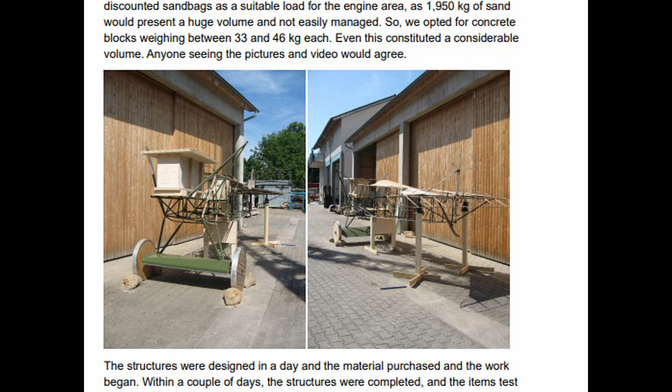We had already discounted sandbags as a suitable load for the engine area, as 1950 kilograms of sand would present a huge volume and not be easily managed. We opted for concrete blocks weighing between 33 and 46 kilograms each. Even this constituted a considerable volume. Anyone seeing the pictures and videos would agree.

The structures were designed in a day and the material purchased and the work began. Within a couple of days the structures were completed and the items test installed. It all looked fine and the date of the test was set for the following Monday, weather permitting.

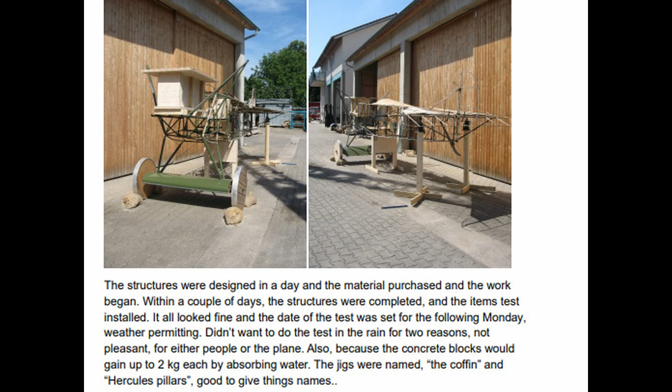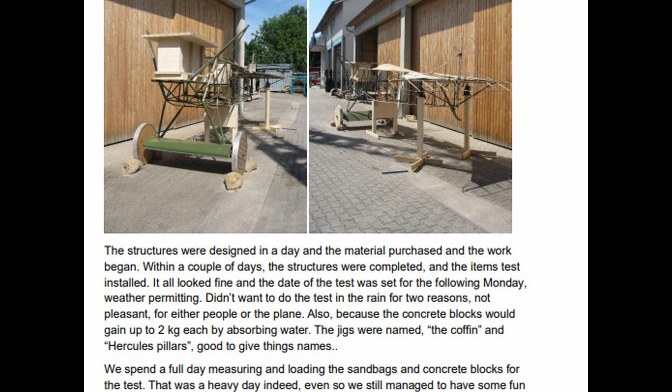Didn't want to do the test in the rain for two reasons: not pleasant for either people or the plane, and also because the concrete blocks would gain up to 2 kilograms each by absorbing water. The jigs were named the Coffin and Hercules Pillars. Good to give things names.

We spent a full day measuring and loading the sandbags and concrete blocks for the test. It was a heavy day indeed. Even so, we still managed to have some fun and enjoy the bikes and the barbecue.

The rest of the first week was taken up with building ribs with Shirley in the bunker and working out minor issues with the bikes, cleaning the carburetor on one, to find the cork float had been attacked by the fuel as its protective varnish coating was damaged. Another bike, the DKW sidecar, was also worked on to get it to run, which it did for a while but died after 10 minutes. No amount of kicking would make it go again that entire day.

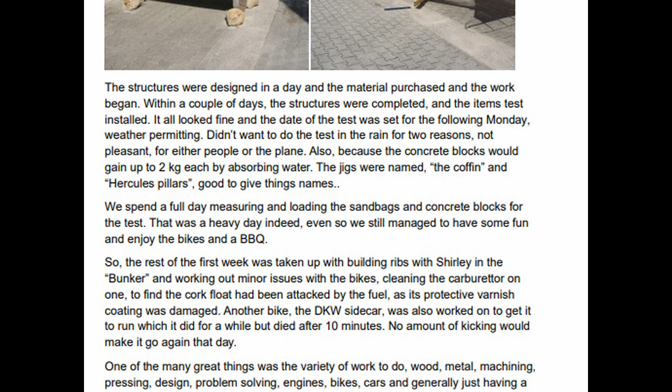One of the many great things was the variety of work to do: wood, metal, machining, pressing, designing, problem solving, engines, bikes, cars, and generally just having a lot of fun. This made for a very relaxed and interesting workplace. Schedules and timekeeping not an issue.

That is not to say that there is no schedule, but an overall outline plan. There are also lots of other interesting projects going on in the background that contribute to the overall building of the planes, like the colors for the printed fabric, the different fabric types, bleached and unbleached, the paint finishes. All these things and many more are tried and compared to original photos, reports, and historic reference material. No detail is too small to achieve the overall authentic build of a Fokker aircraft.

All items are subjected to some form of test, be it load or destructive tests. The purpose is to be sure the components will not fail in flight and to understand the logic of why and how the design was determined. I can say that I'm very surprised about the loading capabilities of these structures. The structure is light, yet very strong, perfect for aircraft operations.

We also went over many Fokker photos and looked at how the tests were undertaken and the sheer number of tests undertaken. This shows without doubt that Fokker took structural integrity very seriously. The historical records support the view that it was not design failure but material and poor execution of building that caused issues with the Fokker aircraft in operational duties.

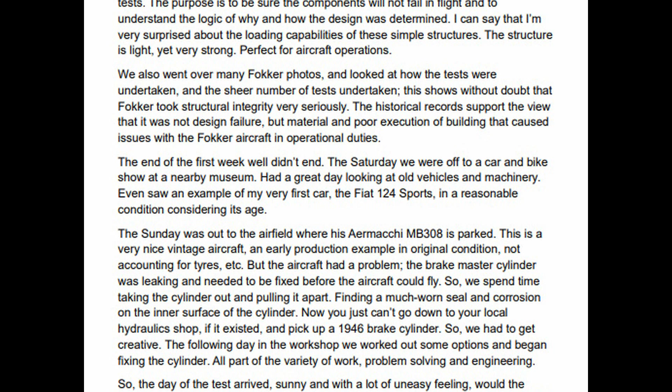The end of the first week, well, didn't end. The Saturday we were off to a car and bike show at the nearby museum. Had a great day looking at old vehicles and machinery. Even saw an example of my very first car, the Fiat 124 Sports, in a reasonable condition considering its age.

The Sunday was out to the airfield where his Aermacchi MB308 is parked. This is a very nice vintage aircraft, an early production example in original condition, not accounting for tires, etc. But the aircraft had a problem. The brake master cylinder was leaking and needed to be fixed before the aircraft could fly.

So we spent time taking the cylinders out and pulling it apart, finding a much worn seal and corrosion on the inner surface of the cylinder. Now you just can't go down to your local hydraulics shop, if it existed, and pick up a 1946 brake cylinder, so we had to get creative. The following day in the workshop we worked out some options and began fixing the cylinder. All part of the variety of work, problem solving and engineering.

The day of the test arrived, sunny and with a lot of uneasy feeling. Would the airframe stand the load? What is going to happen? The atmosphere was tense all day, building up the test in the late afternoon.

For those following Achim's work, you'll have seen the pictures and video. That was a huge step forward and a great achievement. The test was completely successful and no damage was done to the fuselage.

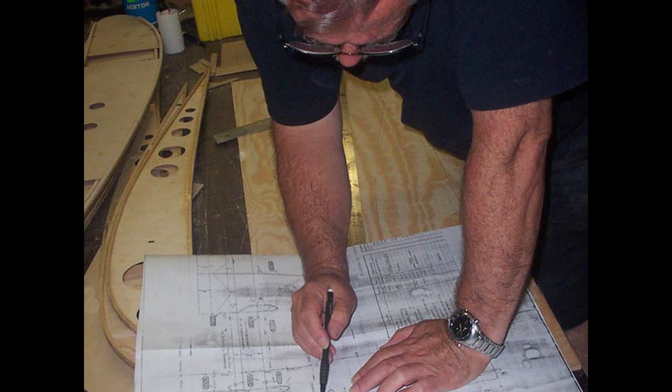These had to be built from nothing. There are no rib drawings, no jigs or examples. That was a lesson in building from one Fokker plan of the middle wing and 2 Fokker photos. Much discussion and consideration were undertaken before the rib web template was designed and built, followed up by the rib jig. One critical part of this rib is the sharp curves on the web cap strip.

There are 2 different methods to making wood bend: steamed with water or a dry method. Achim has perfected the dry method. I'd call it the toasting method, because you place the wooden item on a hot plate toasting it while applying a bending load to shape the wood. This takes skill and some patience.

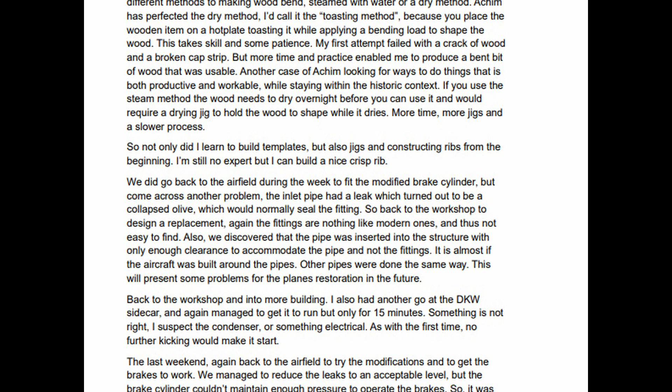My first attempt failed with a crack of wood and a broken cap strip. But more time and practice enabled me to produce a bent bit of wood that was usable. Another case of Achim looking for ways to do things that is both productive and workable while staying within the historic context. If you use the steam method, the wood needs to dry overnight before you can use it, and would require a drying jig to hold the wood in shape while it dries. More time, more jigs, and a slower process.

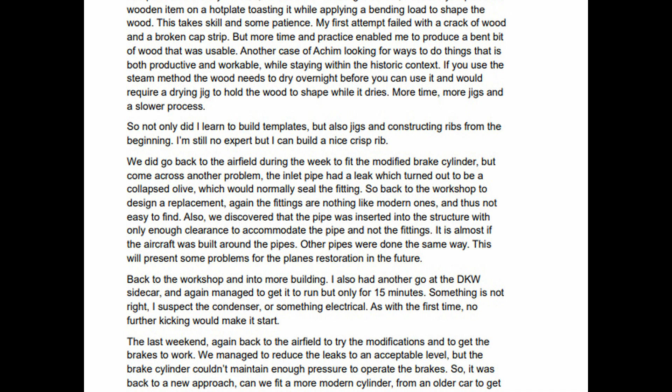So not only did I learn to build templates, but also jigs and constructing ribs from the beginning. I'm still no expert, but I can build a nice crisp rib.

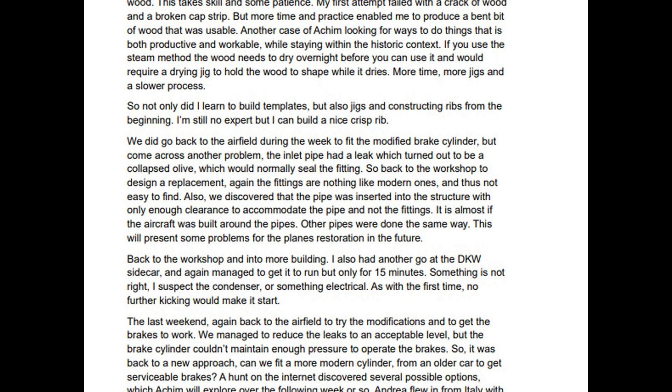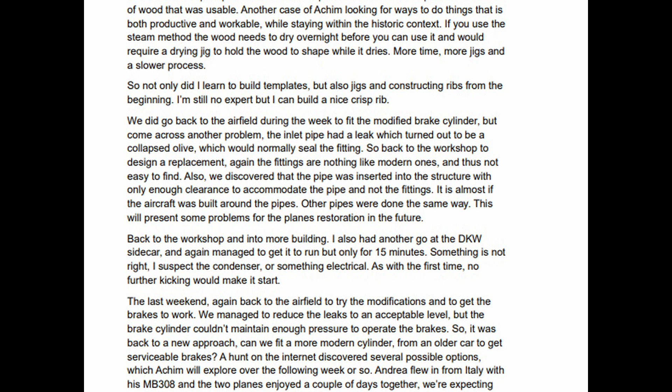We did go back to the airfield during the week to fit the modified brake cylinder, but came across another problem. The inlet pipe had a leak which turned out to be a collapsed olive, which would normally seal the fitting. So back to the workshop to design a replacement.

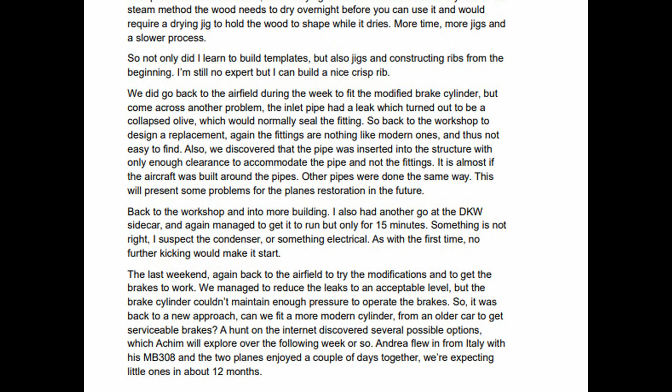Again, the fittings are nothing like modern ones and thus not easy to find. We also discovered that the pipe was inserted into the structure with only enough clearance to accommodate the pipe, not the fittings. It's almost as if the aircraft was built around the pipes. Other pipes were done the same way. This will present some problems for the plane's restoration in the future.

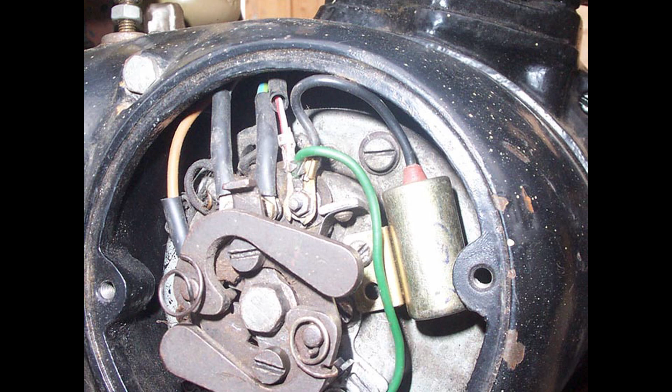Back to the workshop and into more building. I also had another go at the DKW sidecar and again managed to get it to run, but only for 15 minutes. Something is not right. I suspect the condenser or something electrical. As with the first time, no further kicking would make it start.

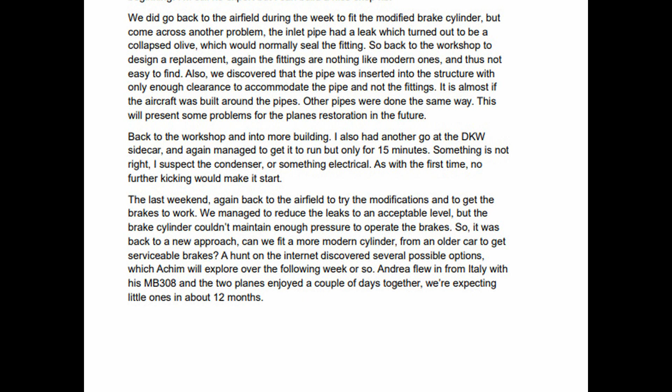The last weekend, again back to the airfield to try the modifications and get the brakes to work. We managed to reduce the leaks to an acceptable level, but the brake cylinder couldn't maintain enough pressure to operate the brakes, so it was back to a new approach. Can we fit a more modern cylinder from an older car to get serviceable brakes? A hunt on the internet discovered several possible options.

Achim will explore this over the following week or so.

Andrea Rosetto flew in from Italy with his MB308, and the two planes enjoyed a couple of days together. We're expecting little ones in about 12 months.

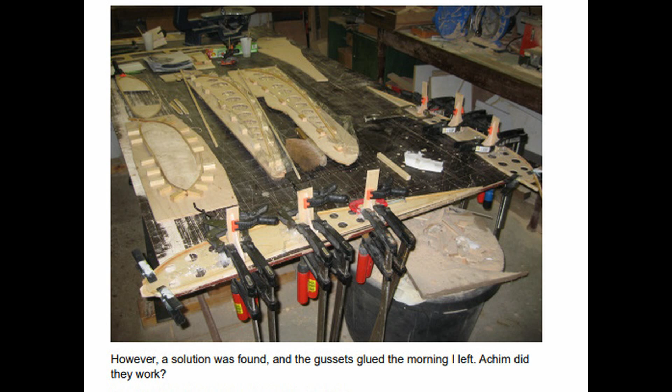Towards the last few days, the pace of work increased as I improved my understanding of rib building. One of the last items I put together was the tip rib gussets. The photos show some wood buried under a sea of clamps, but they didn't work as intended. However, a solution was found and the gussets were glued the morning I left.

Achim, did they work? Gerry, they did.

So, what did I discover and learn from my visit?

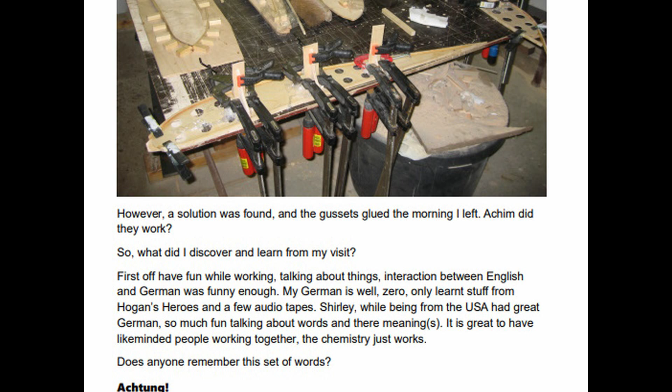First off, have fun while working. Talking about things, interaction between English and German was funny enough. My German is, well, zero, only learned stuff from Hogan's Heroes and a few audio tapes. Shirley, while being from the USA, had great German. So much fun talking about words and their meanings. It's great to have like-minded people working together. The chemistry just works. Does anyone remember this set of words?